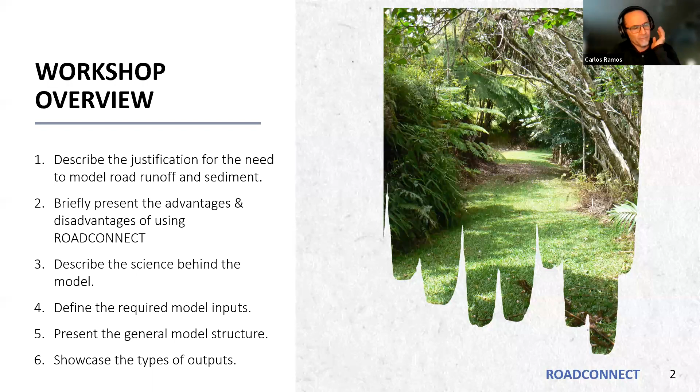So a bit of an overview of what I intend to cover today. I want to describe why do this, and maybe this audience doesn't need this introduction, but I just want to go over that as well, because maybe we're not really aware of other potential uses of this kind of modeling. I want to present the advantages and also the disadvantages of using RoadConnect. Describe the science, what goes behind the scenes, and how I use the science as part of the model. What it takes in terms of the model inputs.

This is an ArcGIS-based model, so the geodatabases that are required. Present the general model structure, what it's doing behind the scenes without all the details, because that's a bit too heavy and would take a very long time. And then also show you what it produces, the types of outputs that you can get out of this, and there's diverse types of outputs that it produces.

So in a nutshell, what does the model do? It takes 3 shapefiles. 2 of those are line type shapefiles: road segments and flow paths, and I'll explain what these are. And then points, which I'm calling here drains and nodes, and I'll explain that in a while. It also takes in, if it applies, a retention pond volume database, very simple, just a database without any spatial reference. And as you begin the model, the user is asked to enter a particular storm size in millimeters of rainfall. So the model runs on a storm by storm basis.

What does it do? It estimates runoff from roads, and in the next version of RoadConnect, especially for coffee farms, it is also going to contain estimates of cultivated land and forest land runoff response. The same thing with erosion, with sediment production.

Runoff from where? Just the roadbed. Okay. In terms of the road, just the roadbed. It's not trying to model anything else in terms of sediment production. It's not trying to estimate cut slope contributions, not trying to estimate any gullying that's happening below the road. Okay, it's just the roadbed, just the travel way, right? The drivable surface.

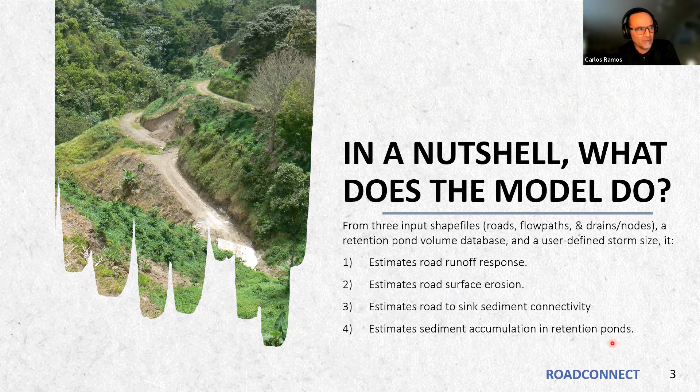Why study sediments? Why do a model on erosion and runoff? One of the first reasons, and this connects directly with the original objective of the model in Cabo Rojo, and also the work that, for example, Bernardo is doing in Culebra: sediments are a key pollutant and considered a major threat. It's not the only threat to coral reefs in the Caribbean. But the corals, as we probably all know, haven't been doing well at all, and they haven't been doing well since we actually started documenting them in the 1960s and 70s.

So here, just to give you a quick view, this is work that was done by Jeremy Jackson out of the Smithsonian Institution, collecting all of the data from throughout the Caribbean. These are regional curves. This curve on the left represents a combination of data from St. Thomas, USVI, Costa Rica, Jamaica, Belize. This is percent live cover in the 60s all the way to the 80s, in the 30s, maybe close to the 40s, and then by 2011, about 10% left. And this is a regional scale look.

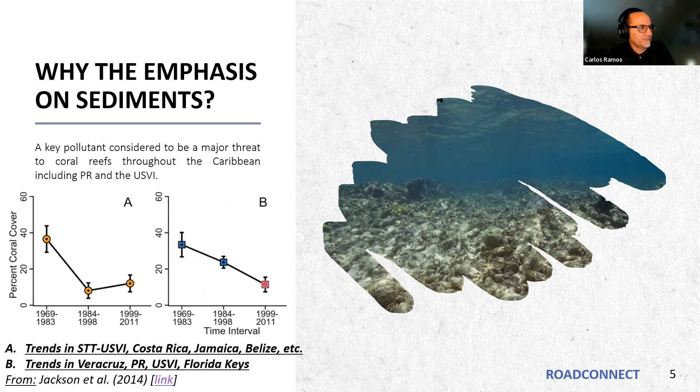This curve on the right, B, are trends in coastal Mexico, Puerto Rico, St. John, St. Croix, and the Florida Keys. From 30-something percent down to maybe 15%. When we look at it closely, this is the case for the U.S. Virgin Islands. It's the same curves, but specifically for the different islands.

St. Croix started in 20-something percent, dropping down. The same thing in St. John, even though we have a national park there. And similar trends in St. Thomas, and then combined with that, especially in St. John, you can see the increase in macroalgal cover.

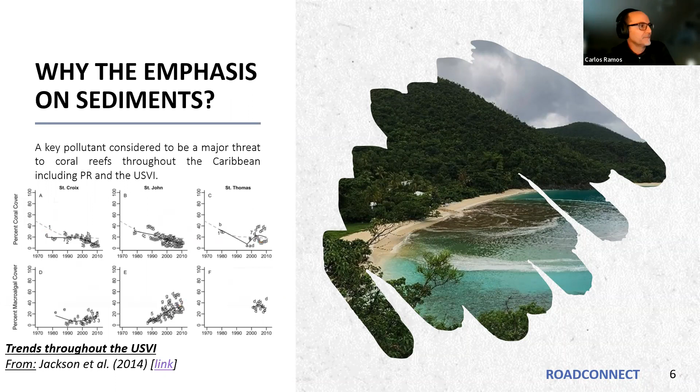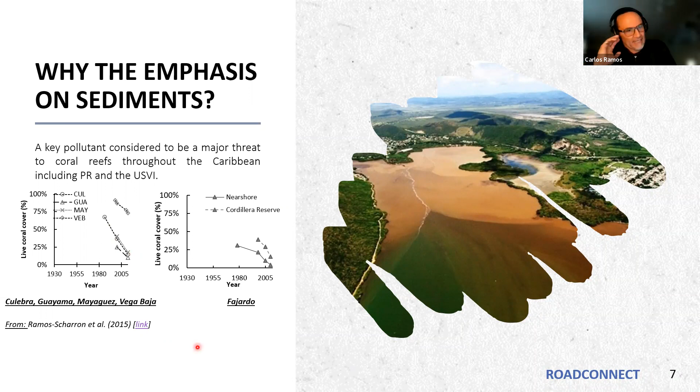How about in Puerto Rico? Same thing. Maybe more abrupt curves here, just because of the type of coral that used to dominate in Puerto Rico, the elkhorn that provides a really good cover. So areas in Culebra, Guayama, Mayagüez, Vega Baja, you can see them just plummeting down, from the 80s up to the 21st century. And then this is a close-up look at coral reefs near Fajardo as well, just plummeting down. And sediments being one of the stressors, not the only stressor.

To what degree do sediments affect corals? At the experimental level in a lab, you can isolate the effect of sediments. We still have not done a really good job combining watershed with water quality and coral reef response within the U.S. Caribbean, and that's something that Caroline Rogers, my colleague and good friend from St. John, and I discussed in this paper. We know it's a stressor, but to what degree it actually affects corals nowadays is still a research question. And hopefully the idea of the model, especially applications like in Culebra, is that the model can help start addressing some of those issues.

It's really expensive and logistically complex to maintain a very long-term monitoring program at the watershed, in the coastal water system, and then also with the coral reefs. So maybe the model can help us fill in some of those gaps.

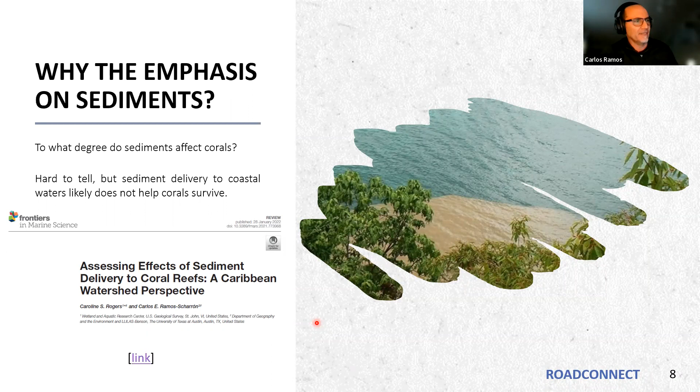Also, and this is something that I think when we discuss sediment issues in Puerto Rico, we tend to overlook, but it's a real problem: it's freshwater quality. Somehow nos acostumbramos a esto. We got used to this at some point in time, right? Rivers shouldn't look like that. Rivers don't look like that, even in other tropical areas, right? Naturally, they don't look like that.

And even in some areas that are being used by humans, right? That's something that we need to think really deeply about, as to why we got used to this. But there are challenges, right, to water treatment and distribution that are tied to high sediment loads. This is exactly what this news story is telling: one of the main filtration plants in Puerto Rico being unable to process water just because of the high

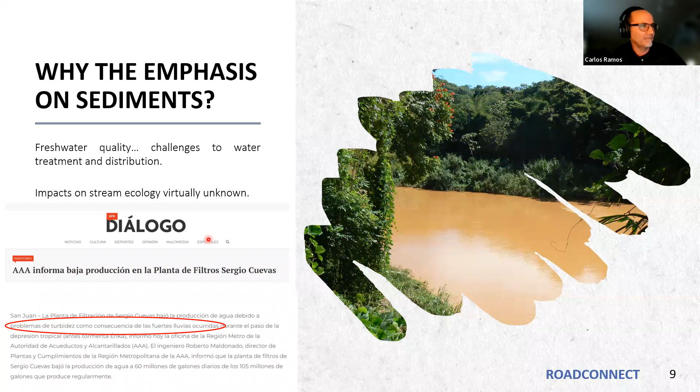loads of sediment. And then something that we really don't talk about, and this is almost a gap in tropical systems, especially in Puerto Rico, is that we really don't know what kind of impact sediments are having on stream ecology, shrimps, and other benthic organisms.

Another reason to do this kind of work is sedimentation of water reservoirs. We really don't know the state of our reservoirs. For the specific reservoirs that we know, we know where they stand in terms of water holding capacity and sedimentation. But for many of them, we don't know, and that's work that we are actually doing out of the University of Texas as well. But we presume that about a third of the water holding capacity, the design capacity, is gone. It's occupied by sediments.

And of course, erosion affecting soil, and the ability of soils to actually maintain vegetation and maintain a crop. But this is something that the models weren't really thought out for. It doesn't come out from that need, right? And that's something that, again, we could talk with the folks in NRCS about how to enhance that capacity of these types of models.

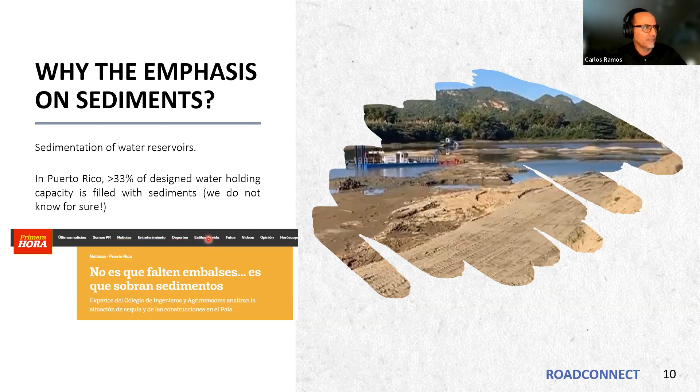Why the emphasis on roads? What you're going to be seeing for the next few slides is work that we have done throughout USVI and Puerto Rico. St. John, of course, that's where I did my dissertation work. East End, St. Croix, work in Culebra, some work in Vieques, work in La Parguera, and work in Cabo Rojo. All of those have in common that they are in a dry tropical setting.

And the most extreme of those settings, which is East End St. Croix, kind of looks like this. That's cacti, right? Really dry conditions, inceptisols mostly in terms of the soils, ephemeral streams, which means that there's very little opportunity for the watersheds, under natural conditions, to contribute runoff and sediment to the marine environment. That's why we have corals near these areas, just because that interaction with the terrestrial environment in terms of inputs is really limited. It happens a couple times a year. And rainfall totals are in the 800 to less than 1,000 millimeters per year.

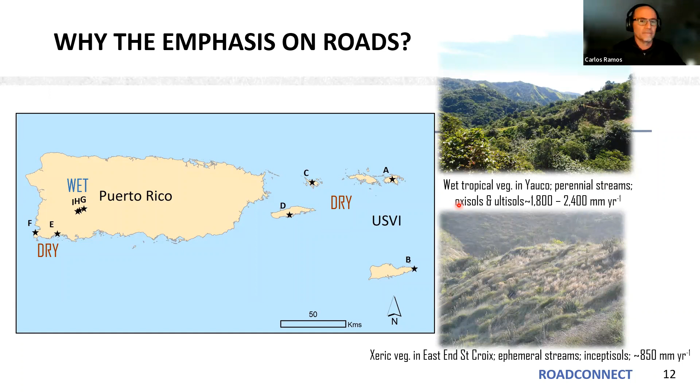And for those of you who are interested, we have a series of publications dealing with these issues. These are not the only ones, but please let me know if you want to get a hold of these. I'll be happy to share them with you.

But a basic result coming out of all this work is that the roads are really driving the sediment budget of all of these landscapes that we have studied. Road erosion rates in dry tropical settings are 10 times to 10,000 times greater than natural areas. And at the watershed scale, road erosion contributes over 90% of the total sediment produced. And this applies to, again, Culebra, Vieques, St. John, St. Croix, St. Thomas, Cabo Rojo, Parguera.

In wet tropical areas, road erosion actually has a greater effect than in dry tropical areas, up to 100,000 times higher than natural erosion rates. And people say, and this has been very interesting, I think Atienza was there when we did that workshop on site at Hacienda San Carlos, Carlos Vega's farm, farmers said most of the sediment is coming from the cultivated land. We had sediment traps on site, and we were able to show visibly that's not the case. Most of the sediment is coming from the roads themselves, the road network.

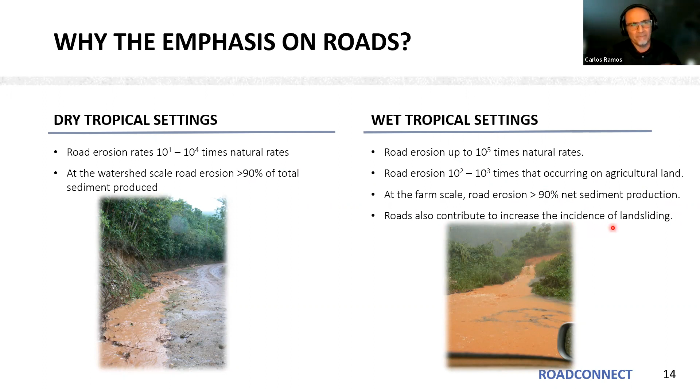So road erosion is actually 100 to 1,000 times greater than that occurring on agricultural land. And similarly to dry tropical settings, over 90% of the sediment is being generated by the road network. And this is something that I'm not going to be talking about today, but roads can also contribute to increase the incidence of landsliding. And maybe RoadConnect could help us understand that process a little bit, but I'm not going to be talking about that today. So why use RoadConnect? There are many other models.

But many of them are still unproven. And there's models that are specific for road erosion, but they have not been proven or tested for our types of landscapes and climate and soils and lithologies that occur in the U.S. Caribbean. Okay, that's a research question that needs to be addressed, right? And most other models do not address sediment contribution from roads. Roads are either ignored or lumped with everything else.

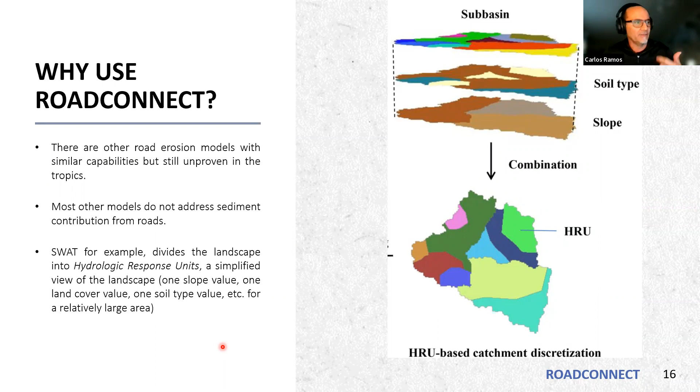An example of that, and this is a model that has been used extensively in Puerto Rico, is the SWAT model, Soil and Water Assessment Tool or something like that. SWAT, for example, generalizes, simplifies the landscape into something called hydrologic response units. So it lumps the diversity of landscapes that are out there, divides the watershed into those, and then makes a calculation in terms of runoff and sediment for each one of those. So there's only one slope value, one land cover value, etc., and then just one result.

So what would SWAT do with this type of landscape? There's a coffee farm in the uplands of Puerto Rico. What I want to point out here is there's obviously a different type of vegetation here, most likely secondary forest. We have this area here, which has a lot of plantain. Most likely the soil exposure is very different from what is over here. Another pocket of early succession, turning into secondary forest. And then, of course, we have the roads.

SWAT will take all of that area, and most likely areas surrounding this farm, and lump it into one single value. So people say, but we have SWAT. Yeah, but SWAT would just give you a solution for that entire watershed. For that entire farm, we cannot really cure the problem throughout an entire farm. That's just too costly and logistically impossible. So we need to find targets, and then we need to find priorities.

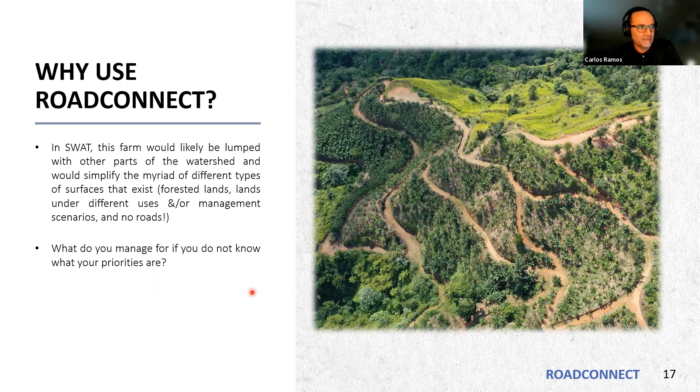And the research that has emerged over 30 years of work so far is that the roads are a priority. But then which roads? You cannot address every single one of those roads. That's too expensive and logistically impossible. So RoadConnect is trying to address that: prioritize which roads actually to address for erosion control implementations.

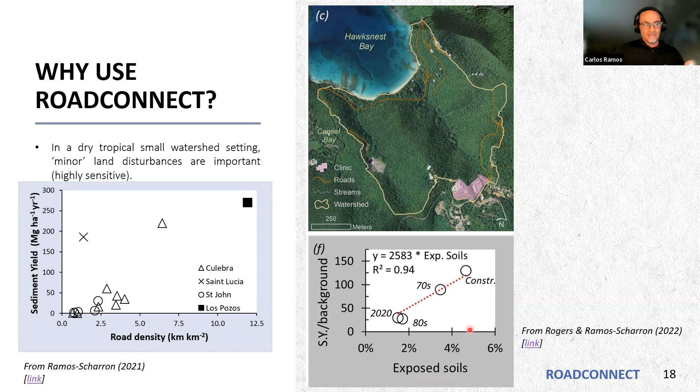These landscapes, especially these dry tropical landscapes, are very, very sensitive. Small scale disturbances can have a drastic impact on sediment delivery to the coastal area. This is an example from Hawksnest Bay in St. John, mostly within the park. Here we're showing that just a mild increase in exposed soils, construction of a clinic, some roads that exist within the watershed causes a very dramatic increase in sediment yields above background. Just disturbing 5% of the landscape increases sediment yields by over 100 times.

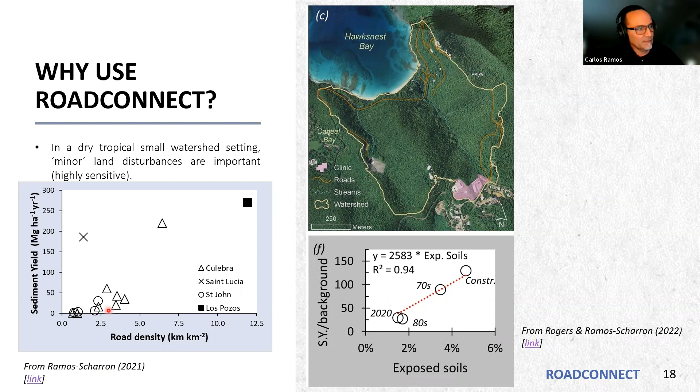And all of these are corals. The outlets for the little drainages that come out from this watershed, there's one here and another one here, are a couple meters away from the corals. So very sensitive. And what we have been promoting is that sediment yield is almost a product of road density, and these are unpaved roads. So as you increase the density, you increase the sediment yield. So that's the dry tropics.

How about the wet tropics and the coffee growing area of Puerto Rico? There's tons of roads. It's unbelievable when you actually look underneath the canopy how many roads are there. This was shocking to me, and this took a lot of time to map. We used LiDAR to map this. This is Lago Lucchetti in Yauco. You can see how many roads, over 900 kilometers of roads, and I would say about 85% of those are unpaved.

These are the main roads, the public roads, carreteras estatales, but everything else in brown are roads within coffee farms. Just so that you can navigate a little bit, Hacienda Candelaria would be here. These are the Ruiz family's farms up here, and then Carlos Vega would be somewhere around here.

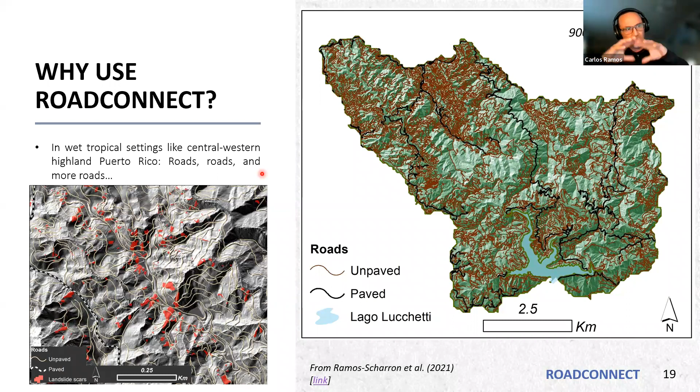So this accumulated impact of all these roads is really severe. Okay, so they're part of the landscape and they're there to stay. So we need to understand them. Here, a bit of the science behind RoadConnect. Where do the functions that we use to calculate runoff and erosion come from?

Okay, a lot of what we're doing comes from rainfall simulation experiments. Basically, we bring this rainfall simulator, just a fancy shower, right? That's standing about 4.6 meters above the ground. We use a water truck to pump water into the system. We delineate the surfaces that we want to measure, and then we collect runoff and sediment coming out, okay?

With the combination of rainfall measurements, you can see some rain gauges along the sides of the plot here, and knowing runoff, we can actually back calculate infiltration capacities, and that's something that is used for the model. So this is two different plots for a cultivated surface and a road. I believe this is probably an oxisol or an ultisol and an unpaved road. And this is a cultivated surface mostly for coffee, okay?

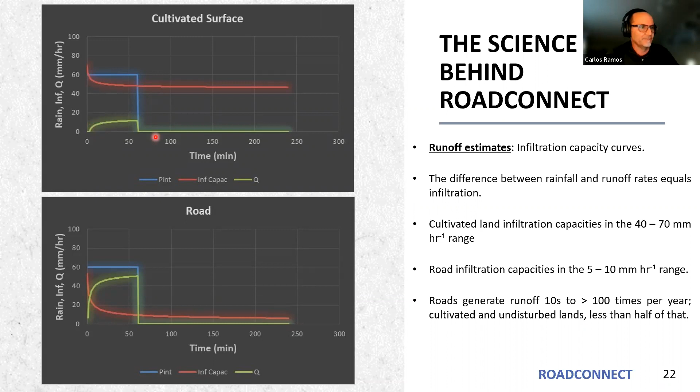And then also for individual roads, depending on the slope, depending on the surfacing, we can also calculate infiltration capacities. What we see in here is an unpaved road, and then this is a gravel road. The changes are not as dramatic, but the gravel road has a slightly higher infiltration capacity than an unpaved road, okay?

So far, in terms of the data that we have to feed the model at this scale, in terms of rainfall simulation, we have over 100 simulations done in coffee farms in Puerto Rico, about 15 in Culebra, and about 20 so far in Cabo Rojo. So we use these to create the functions of the model.

Other types of measurements that we can use at different scales: a Guelph permeameter, just a borehole test. We can use flumes, and this is a way that we're going to be using to validate the model in Hacienda Candelaria and Yauco, to see if the model actually provides us with a realistic volume of water flowing out at the scale of maybe a portion of the farm. This is really important, just showing that the model actually provides realistic results.

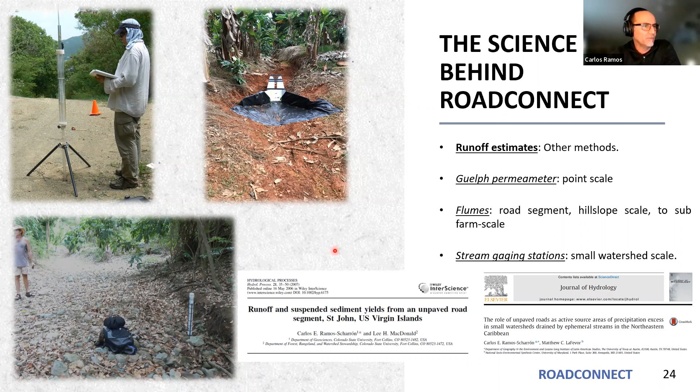And then in St. John, we have actually monitored stream flows coming out of the small watersheds.

How does RoadConnect actually use this information? RoadConnect simplifies the hydrologic response by just using the runoff coefficient. And runoff coefficient is basically the percent of the rain that is converted into runoff. So roads of different types, with different soils, with different slopes are going to have different runoff coefficients, and that's embedded in the functions and the algorithms that go into the model.

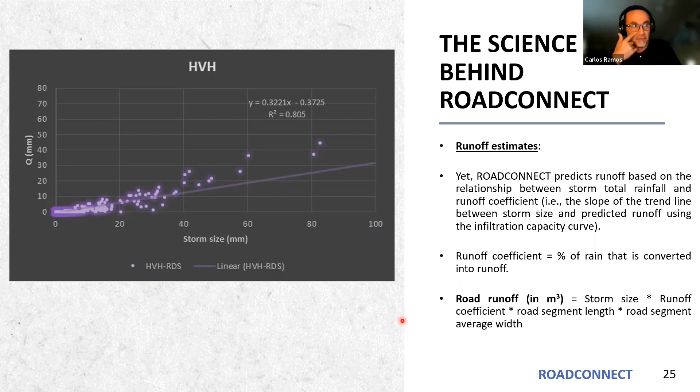So road runoff in volumetric terms depends on the storm size, the runoff coefficient, how long of a segment you have, how big of a surface you have that's actually generating this runoff. Okay, very simplistic approach, but it's fed from actual data collected in these areas.

For erosion, we also depend on rainfall simulations. Eventually, we can also use other types of data. This is actually part of Jaciel's thesis, using sediment traps. We have used sediment traps to measure erosion rates from cut slopes.

And then similarly to the flumes that I just showed you, sediment detention ponds can be used as a way to see if the model is right in actually conveying all of that sediment from the road downstream. So we have used this to calibrate or validate the model in Cabo Rojo, and that is done by just measuring accumulation rates using surveying equipment.

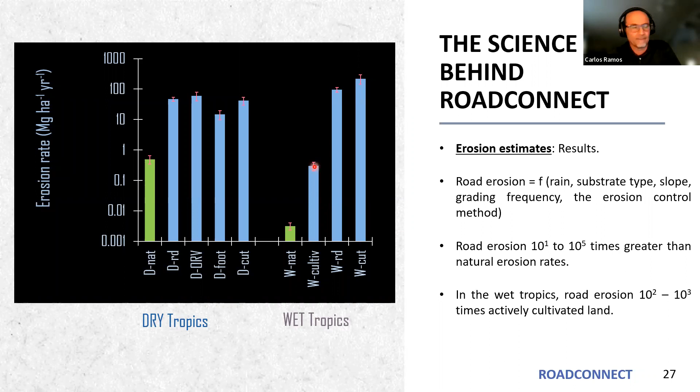Okay, you had a brief overview of this already, but then, right, the impacts of roads in increasing erosion rates. So in the dry tropics, several orders of magnitude, the same thing: natural rates, and then these are roads. They're having a much higher effect on erosion rates, and roads actually have erosion rates that are much higher than cultivated land. And these are orders of magnitude higher. Very similarly to runoff.

How do we calculate road erosion? In tons. Each road type is going to have its own erosion rate. What do I mean by road type? Its location, which controls its lithology and soil type. Whether it's been graveled or not, how often the road is graded, how steep the road is. So all of that information needs to be given to the model, and it recognizes which road you're talking about and then applies that erosion rate.

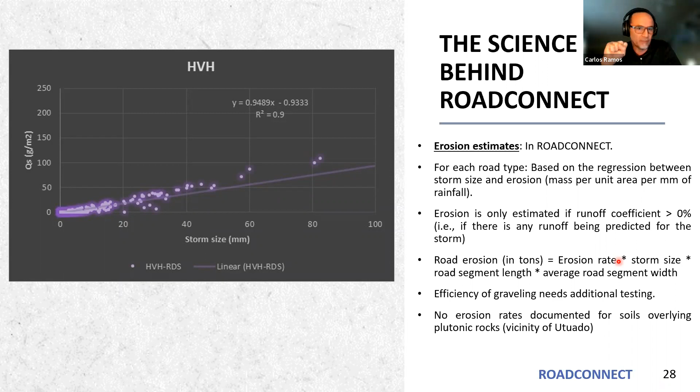Storm size, that's a user-defined parameter in RoadConnect, and then the size of the road, the road surface that's actually producing the sediment. I'm just going to point out that the efficiency of graveling is going to be embedded in the model, but it needs additional testing. We only have 4 rainfall simulations done on properly graveled roads, and that's something that needs additional testing, which means it needs additional funding.

The same thing with cultivated lands. We have a very limited amount of data on those. Most of the work that's been done has been done in Yauco and Maricao, especially in the coffee farms. So nothing has been done on the coarser soils in the vicinity of Utuado. For Culebra, for the US Virgin Islands, I'm satisfied with what we have. I don't think we need to go back and do any more simulations.

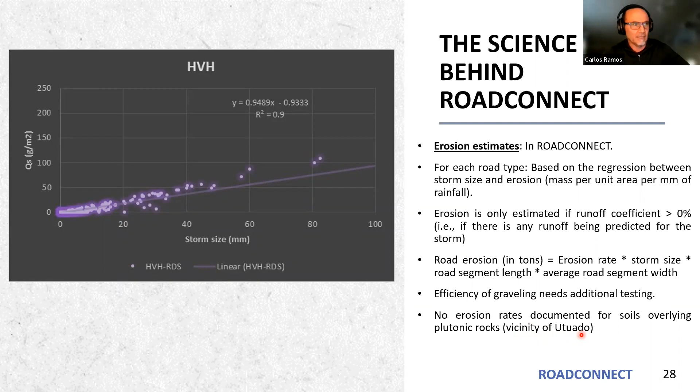Connectivity: how much of that sediment that's produced on parts of the landscape actually makes it down into a water resource of importance? This is one of the hardest problems to deal with in hydrogeomorphology. Logistically, it's very, very hard to do, and also the physics of these processes are very complex. You can see that people from the 80s all the way to recently have been trying to come up with approaches to this, and I'm proposing a new one. This is a new approach to road connectivity, especially with the sediment portions.

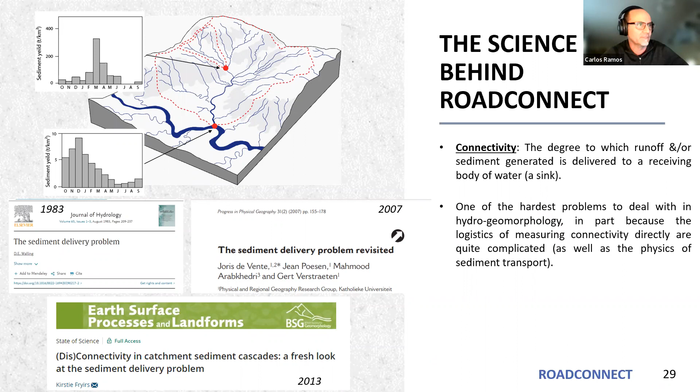So given a certain set of circumstances, storm size, the length, the surface area that is actually generating runoff, RoadConnect tries to tell you: can that runoff actually make it during one single event all the way to your target or your sink? If the answer is no, then that's a 0. None of that runoff or sediment made it out into your sink. If the answer is yes, then it tries to answer how much. That number is always going to be less than 100%.

There's always going to be some water that's going to be infiltrating into the landscape. There's going to be some sediment that gets filtered. And one of the things that RoadConnect is trying to do is to see not only the filtering capacity of the landscape, but also detention ponds. And we'll see how it handles that.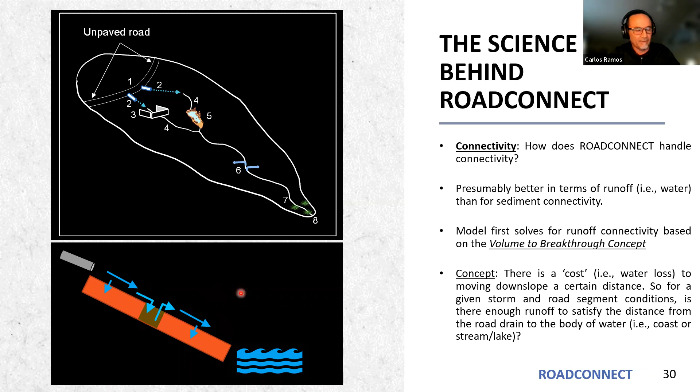So the metrics of the volume to breakthrough concept are in cubic meters of water needed to advance 1 meter downslope. So if it costs 0.25 cubic meters of water to advance 1 meter downslope, how far can 100 cubic meters generated by a road at a culvert travel downslope? So basically this is the potential, the water that you have available, that runoff. That's the cost. You basically divide the potential by the cost, and that gives you a total distance that water can run over the surface.

So if a coastline is greater than 400 meters away in this situation, then you have no runoff delivered. But what if a coastline is 200 meters from the road drain? How much of the original 100 cubic meters is delivered? Basically use this ratio. This is your potential, and this is reality. You solve for that, and in this case, 50 cubic meters of runoff will be delivered to the coastal environment or to your sink.

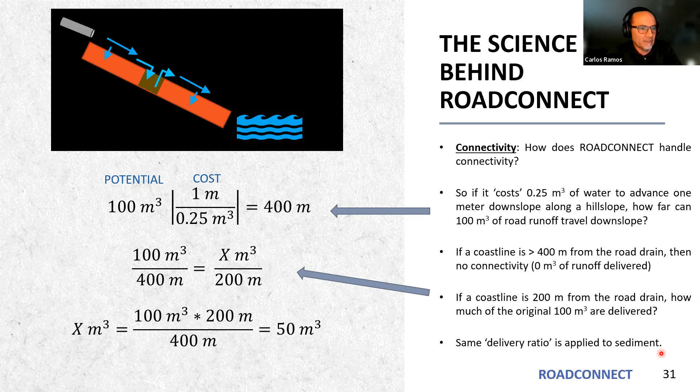Okay, and the same proportion is actually applied to sediment. That is not accurate, that is not correct, but that's the best we can do right now. This will require really sophisticated experimentation. Okay, it's doable, but then it requires fieldwork. Okay, this is the best we could do, or somebody else develops an equation that we can actually rely upon.

Okay. Now I mentioned sediment traps. How does it address the trapping capacity of sediment traps? It uses this equation. Okay, I'm going to boil it down into the essence of this equation in the next slide. But notice this. This has not been tested in the Caribbean. Again, another opportunity to do field work and to have additional work feeding into these types of needs, right? We are increasingly relying on detention ponds, especially in Culebra, to reduce sediment delivery to the coastal environment.

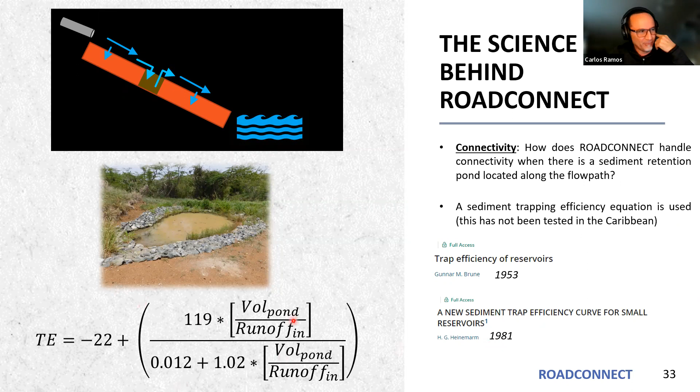But we rely on an equation that actually, the essence of the equation, the parameters, right? These numbers, what does that mean? I really cannot tell you right now what it means, how they came up with this. This is empirical data, right? From 1953. Okay, and then revised or reformulated in 1981. Okay, so this is another opportunity for additional research, and this is the type of research that National Science Foundation and those guys are not going to fund. They're not interested in this kind of stuff. Okay, this is too applied. Okay, so these funds have to come from somewhere else.

So in essence, what does the equation say? The larger the pond to runoff ratio, the larger this, right? So a very large pond, very small runoff event, you're going to have a high trapping efficiency. Okay, the smaller the pond and the greater your runoff input, the less efficient it's going to be at trapping sediment. Okay, so trapping efficiency depends on event size, and also the surface area that is flowing into the pond. Okay, and it also depends on what? How much sediment is trapped in the pond. Okay, so as you accumulate sediment, the trapping efficiency diminishes. Okay, and this is something that manually we can still incorporate into RoadConnect. We can see how the efficiency actually declines through time.

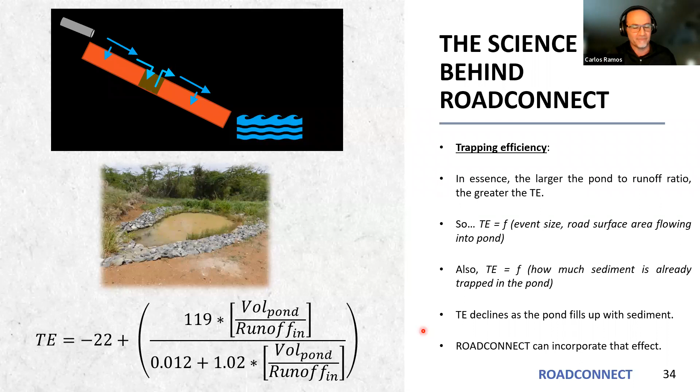What is missing in RoadConnect? There's only one runoff generation process that we can actually incorporate into the model. That's called precipitation excess. Basically, when it was raining harder than infiltration capacity. Okay, that's what we measure directly during rainfall simulations. That is not the only way that.

Sorry, I'm watching a Mandalorian, so on the way I always hear "the way" and think about that.

That's not the only way that runoff is generated. Actually, under natural forested conditions, there's other processes that contribute to runoff production, right? And one of them is saturation excess overland flow. We basically saturate the entire soil profile, and then it emerges onto the surface. Okay, that is the predominant process by which runoff is generated in most of these landscapes. But especially in dry tropical scenarios, this is very, very rare. Okay, typically soils are really dry.

When is this process actually triggered? Whenever you have a very long event, or a series of events in succession, right? That's where you can actually saturate the soils. And then you have this, what I'm showing here, this is in Culebra. That's very rare to see in Culebra, right? A flowing creek. This is a condition in which runoff is mostly being generated by this process and not this, okay?

And the geodatabase, when you see what it takes, it's still very, very hard to do. It takes a very long time to develop those, especially in the coffee farms. In Culebra, it's a bit simpler, but in the coffee farms, we'll see what it takes.

One thing that I want to show here, I'm going to step away from my PowerPoint, is a product that is ready to go, and we'll share it with you guys, Alberto and Gabriel and whatnot. This is something that we came up with as part of this project to help you make estimates of runoff production from coffee farms and also sediment production from coffee farms.

Okay, and at some point, dime. Sí, tenemos una hora. Okay, perfecto.

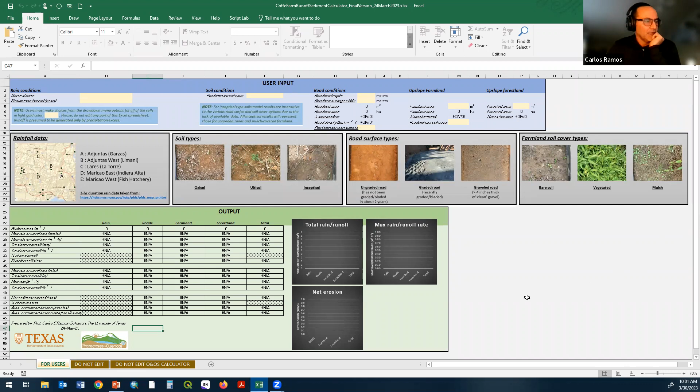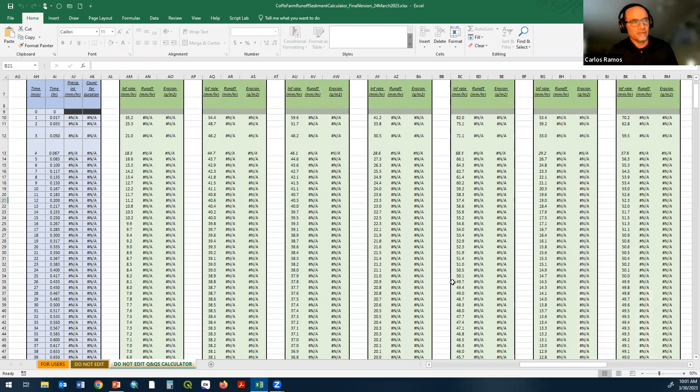So this is something that has all the functions, and again, these are all locked, but this has all the functions that I was talking to you about in terms of erosion and runoff and infiltration capacities and whatnot. So that's embedded in here. Now, it's very simple to use as well.

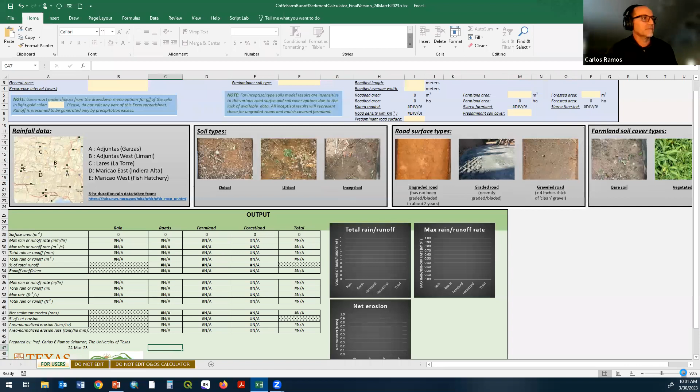And at some point, Alberto and Gabriel, we should sit down and see what you think about this, because I know you use the curve number method, and we would like to compare and see how useful this is for you. So first thing that you do, and this is not RoadConnect, this is an Excel spreadsheet on its own, you choose the general area that you're working on. So here we have Adjuntas all the way to Maricao.

This is feeding off data from the weather service, from 3-hour duration rain data. So let's say your farm is in Maricao, in Indiera Alta, and you want to model a runoff event that has a recurrence interval of every 50 years. You can see you can choose from 1 all the way to 100.

And again, these are 3-hour duration data. If you guys use a different duration for your modeling and your estimates, it could be easily adapted to this. That should not be a problem. That's the kind of conversation that I want to have with you. What is the predominant soil type? We only have here what we have actually done experiments on: ultisols, oxisols, which seem to be responding very similarly, and then inceptisols.

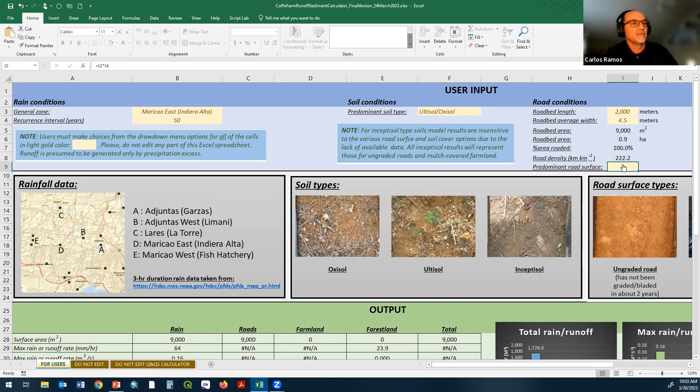Let's say you have a farm that's draining into a spot where you want to design a culvert. How many roads do you have above that? Let's say that we have 2 kilometers. What's the average width of the roads? Let's say 4.5 meters. The predominant road surface: is it mostly ungraded, freshly graded, or gravel? Let's say it's recently graded. These are going to produce much more sediment than an ungraded or a gravel road.

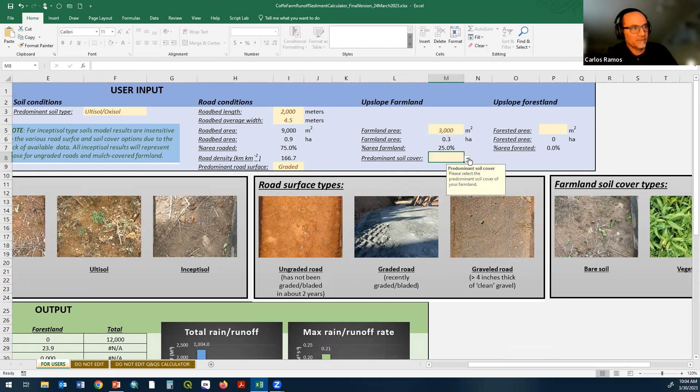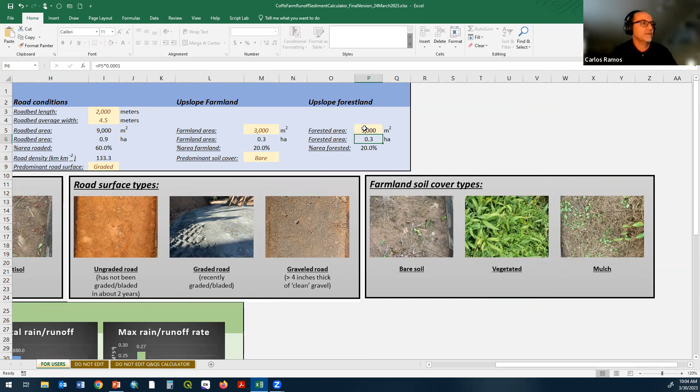What's the size of your farmland area, the cultivated land? Let's say 3,000 square meters or something like that. And what is the predominant soil cover? Is it bare or vegetated mulch? You have visuals to guide you to what this looks like. Let's say it's bare, let's make it as nasty as possible. And then you have 3,000 meters of forested land upslope from you. It calculates and gives you immediately the maximum rain rate. So this is the rainfall.

Okay, it gives you runoff rate from each one of them, and then also total. Okay, so for example, for this event, and I'm not gonna stay too long here. I'm just gonna show you this, right, and then we can talk about it later. But it gives you a total volume. Okay, it's also useful for designing like detention ponds and that kind of stuff, right? And then the maximum flow rate into the pond.

Okay, and then it gives you the amount of sediment that's eroded and the amount of sediment that should make it into that spot. And again, this is not RoadConnect, but we did this as an aid, considering the needs that you have for modeling this kind of stuff and seeing how this compares to the actual methods that you use nowadays. Okay.

Yes, Carlos, just a quick question. I really like that spreadsheet. Is that something that we can expand to the whole Puerto Rico or Caribbean area? Because I see it as a good tool for, let's say that island-wide, we want to rank farms and we want to address the farms that are eroding the most, and that way we'll have a way that we can rank them. That's a good use of this,

but then remember, this is just calculating how much runoff and erosion is generated. It's not, and that's why it's different from RoadConnect, it's not connecting that into the receiving waters or streams. Okay, so still the use is visible now. What you're seeing here is feeding off only the rainfall simulations that we have conducted in a very restricted part of Puerto Rico. So in order to do that, we will need to either replicate that or have data that we can actually trust.

I mean, again, these are our oxisols, ultisols, mostly from upper Barrio Rubias and Frailes in Yauco, and then Indiera Alta, Indiera Fría in Maricao, and then some inceptisols that we ran into also in Yauco, in Aguas Blancas, right? But again, yes, it's possible, but we don't have the data for that, Alberto.

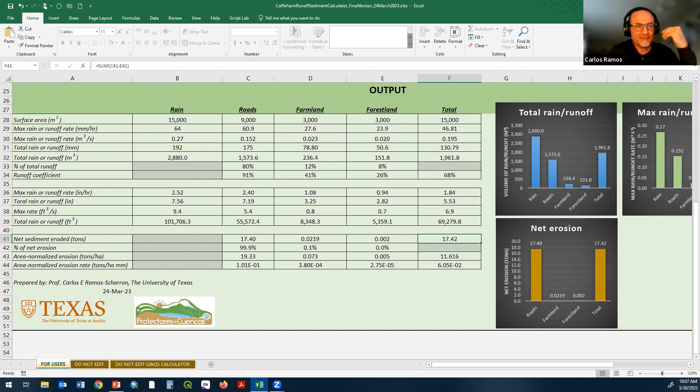All right, yes, thank you so much. That's really interesting. The potential is there for that kind of stuff, and yes, that's the whole idea. And then for us to talk and come up with something that makes sense from the perspective of science, but also from the perspective of your needs, right? So this is supposed to be customized for you guys. Absolutely, thank you.

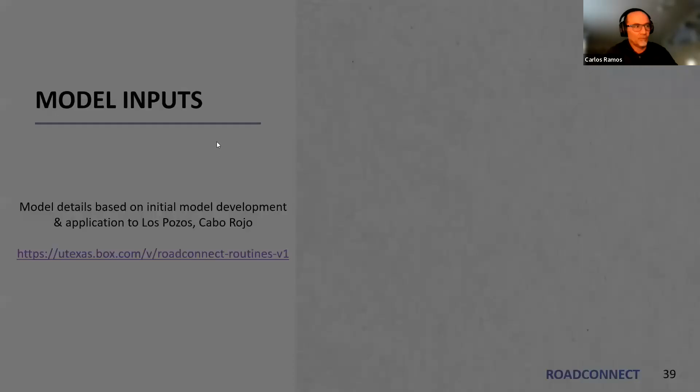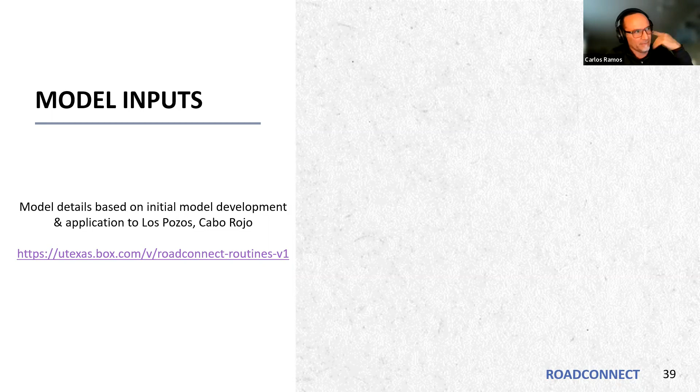Okay, so what does it take? Going back to RoadConnect. What does it take? Again, you can click on this and that will take you to a lot more detail than what I'm going to be presenting here as to what the model does and the inputs. Now, important for RoadConnect, and I don't want to get too technical, you need to create this folder called RoadConnect in your C drive, and you immediately see why I'm a rookie at modeling, right?

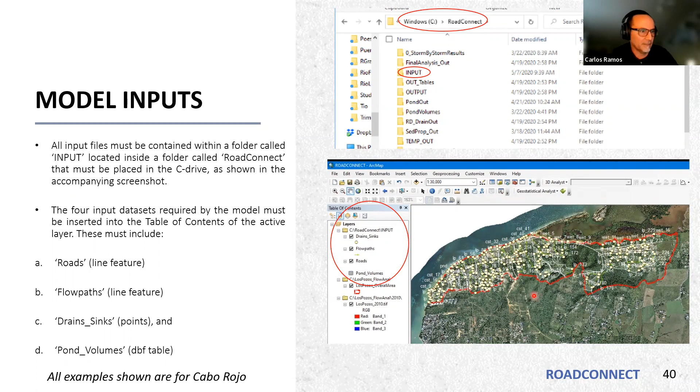Okay, roads. The roads have to be split, right? So you map all the roads. You can use aerial photography. You can use LiDAR, right? LiDAR shows everything that's under the canopy. So the combination of both is what I would recommend. And then if you can go to the field, you can map the drains, and actually you can do sketch maps of how water is flowing, right?

You want each segment to be hydrologically consistent, meaning, for example here, let's assume that this is draining this way. The slope of the road is this way, and there's a drainage point here that's taking all of the runoff coming from above and forcing it off to the side. So this is the end of a segment and the beginning of another segment, and then there's another drainage point here, and that's the end of that segment. That segment is represented by a line here, and by a row here. Okay.

Important details, attributes, right? Characteristics that must be stored in this shapefile. This is a shapefile. The road length, you allow ArcGIS to calculate that for you. The road width is something you can either measure in the field, or you can use aerial photography or the LiDAR DEM to help you with that. So those two are relatively easy, and then the area is just a product of those two.

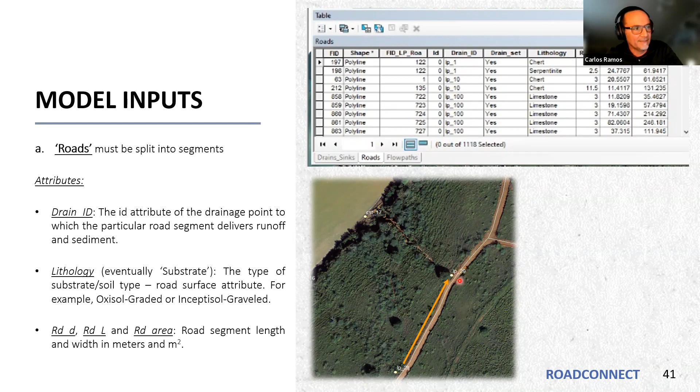And then drain ID is basically, this road segment ends here and is draining to this segment. So this segment, whatever it's called, should have LP_29 in its drain ID entry. So this connects to that. So that is the road input necessary.

Flow paths. Flow paths is something that we rely on ArcGIS to do for us, and sometimes you need to edit some of them a little bit, but you rely on the digital elevation model to create these. Basically, every road drain that we see here is going to have a flow path. So you use topography, you use ArcGIS to map the flow path.

So, for example, a drain exists here. That drain would force all the runoff into this area and then join this other flow path here and start coming down. So you can see what the flow path is saying. It's just tracking the distance from your source, from where the road is dumping water and sediment, and it's telling you where it goes.

Two attributes are important here. The drain ID is basically the drain that's leading into that flow path, what is the point or node. It needs to know that name. And then its length. If you remember the volume to breakthrough concept, that's where that distance comes from. Can you actually overcome the distance required? For runoff delivered here by a road, can it make it all the way out into the coastline? So again, this is another type of input.

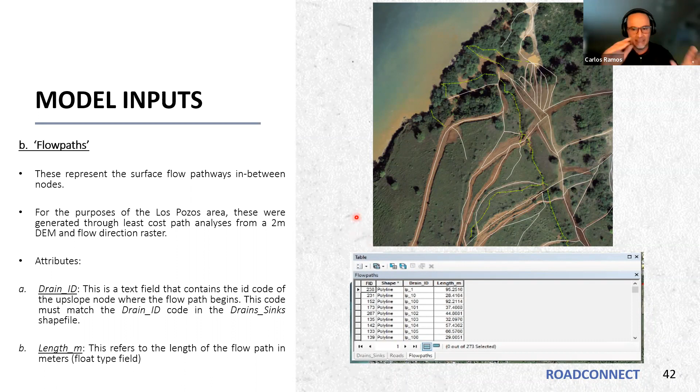The drains or the nodes, the points. There's 5 different types of points. Road drains: the culvert, the cross drain, the point where runoff exits the road system. Connectors, where 2 flow paths meet. For example, I'm not showing all the points here, but that's a connector right there. You see there's a flow path coming through, another one coming through here, and they meet there. So that's a connector.

Sediment retention ponds, we got 2 here. There's one here, there's another one here. So those are identified as well. And end nodes, these are the ones connected to your sink, in this case the coastline. So these 2 are end nodes.

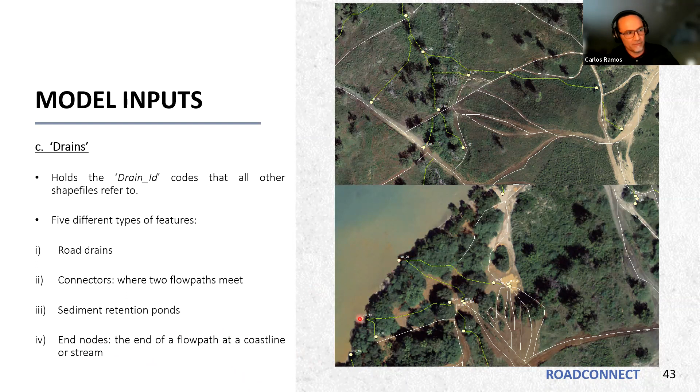What goes into this database? This is hell in ArcGIS. This is the hardest part in terms of the time and level of concentration it requires, because it's being done manually at this point. These are points, and the points are not really easy, but you can use contour lines and the topography to guide you through mapping those, or if not, you rely on mapping at least the road drains in the field.

Now, you can see that the attribute table for each one is a bit more complex. It's got its name, its drain ID. And again, the drain ID is a way to connect the road inputs.

What's coming, what I calculate from the road shapefile into this database. Okay, and it also connects with the flow paths. So this is what's tying up this database with all others. So drain IDs, right? It tells you the type, whether it's a pond, whether it's an outlet, whether it's a road drain, whether it's a connector.

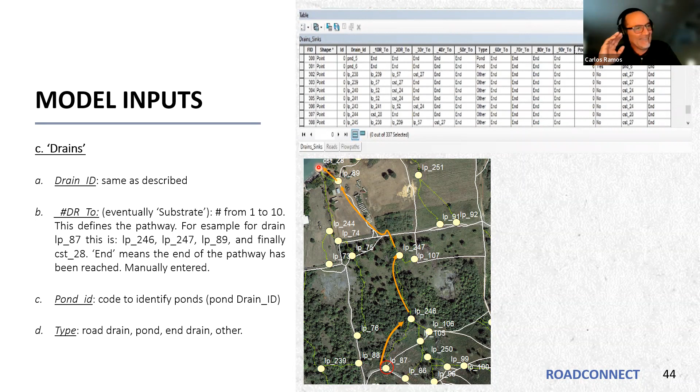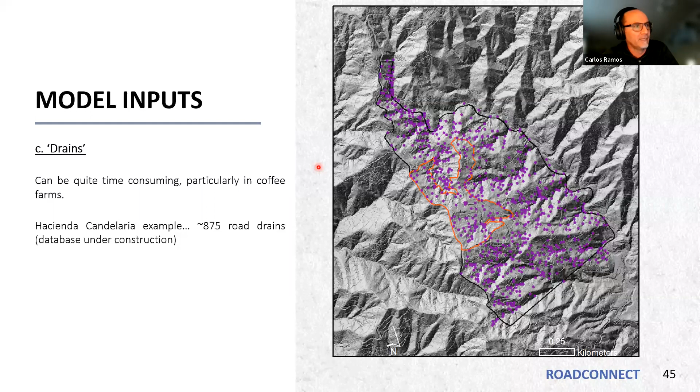Again, in Culebra, it's much easier, right? Because we have less roads. But how about the coffee farms? This is Hacienda Candelaria. 875 road drains. It's not even the connectors, right? These are only the exit points from the road network. So this needs to be automated eventually, right? That's what I wanted to do. This requires so much time, and researchers, we're just nuts, right? So we can go ahead and do this, but you cannot expect people to spend the time doing this.

And then you can see here how this is again Hacienda Candelaria. You can see how the different road drains are actually being connected, and the attributes are the ones that make those connections possible. And this is still in the works. This is something that I've been working on for a couple of months now, whenever I have the time. But you can see how the database is being built. This is relying on topography and the LiDAR DEM to draw those points and make the connections.

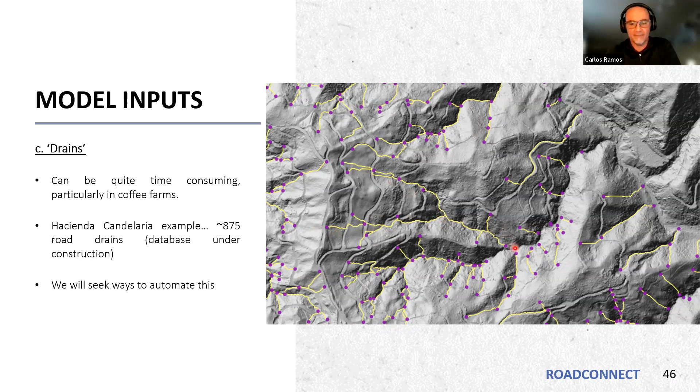Yaciel, how are we doing with time? We have 40 minutes. Okay, we're good.

And then the ponds are identified as points in that database, but it also has a separate table, which for the pond name has the ID that it has on the point database, and then it has the volume of the pond. This is something that the user can change. One thing that I do, let's say that I want to run the model for a month's worth of rainfall. The results of the first storm tell me how much sediment accumulated on the pond, and then I subtract that amount from this. So I keep editing manually this database. So the next event, the trapping efficiency is going to be less.

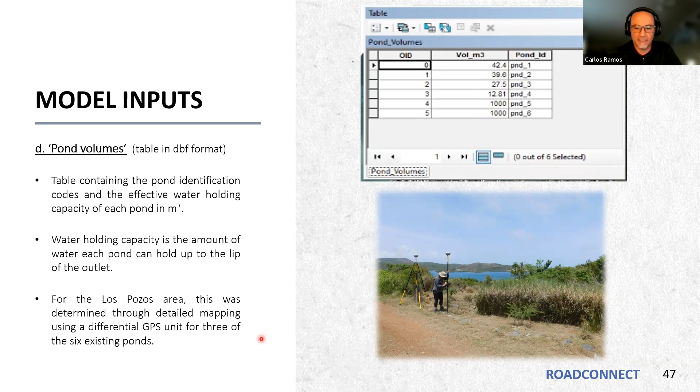So we can actually do this with RoadConnect. And then the volume, right? We use surveying equipment to actually measure them, and we're going to be trying to use LiDAR to measure some of these as well for Culebra.

Again, I don't want to spend too much time on this, but it needs a series of folders to be pre-created. And most of them start up empty. The only one where you need to have some information is where all of those shapefiles on the pond database are saved. Everything else is going to be used by the model, and it's going to be throwing information there. And again, you need to be on the C drive in order for this to run properly. If not, the model is going to get lost, not be able to find the information.

It's built on Model Builder. Model Builder automatically creates Python code, but I don't even look at that. Model Builder is a very visual way to create these models, and it's a series of modules if you want. In total, it's what, 10, 13? There's a series of models.

There's one module that actually calculates road runoff and sediment. Basically it takes all that sediment from the roads and tells you, for this event, how much sediment and how much runoff is generated by each one of those road segments. The routing ones are the ones that are passing sediment and runoff downslope or downstream. And then these last two are basically just assembling the outputs.

Okay, this is the road runoff and sediment routine. It calculates discharge and sediment based on user-defined storm rain total, right? So basically what I showed you earlier, how do you calculate runoff using the runoff coefficient, and how do you calculate sediment based on erosion rate. Okay, that is what it does.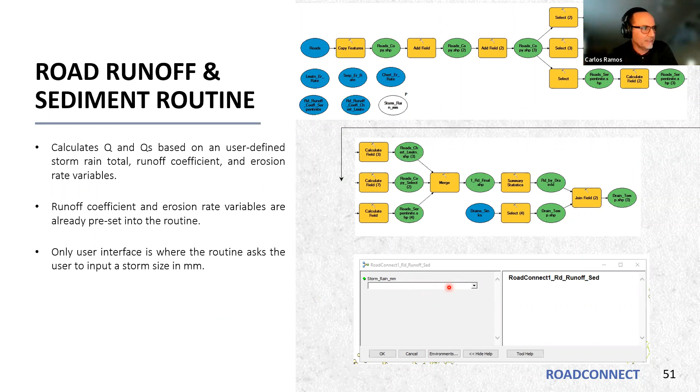And then when you start the model, they'll ask you, okay, what is the rainfall size? What's your storm size? So this is the only time that you actually have an ability to interface with the model. This could be 5 millimeters, it could be 100 millimeters, depending on the storm size that you want to model.

The routing routines, again, I sort of explained this already, right? But it tries to connect how much of the runoff generated at a point, or reaching a drain, actually makes it into your destination. And it is able to combine different drains if they actually coincide in space.

Okay, so the ability of runoff and sediment generated at this point to make it to the coastline does not only depend on the volume of water and the length of that flow path, but it also depends on whether there are any other contributions, right? If this is very small, but still makes it over here, and this is huge, then this has a higher potential to making it down into the coastline. So that's basically what I'm showing here. The potential from A to E depends on the potential from B to C to D, and from D to E. And it combines all sources.

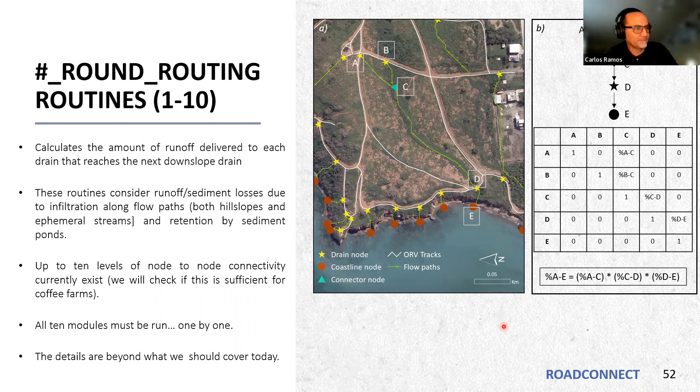And you can see how complex this gets in some landscapes, especially in coffee farms. Right now we have up to 10 levels of node-to-node connectivity, so we can have 1, 2, 3, 4, 5, 6, 7, 8 connections before it makes it into the coastline. We'll see if that's enough for the coffee farms. I believe it is, but we'll see. And then it just assembles the outputs, the tables and the shapefiles that it's going to put together.

Types of outputs that it produces. And this is actually an input, but I just want to show it. This is what we did in Cabo Rojo. We had rainfall data from May all the way to the end of July, or early August, and these are the individual events that we modeled.

Now, one potential output, and again, this still has to be manipulated by the user, right? It's not that the graphs come out automatically. That's something that you really cannot do automatically from ArcGIS. This is something that you need to export into Excel or whatever package you use. But these are examples of watershed, a given area, or farm scale outputs.

It is the total amount of runoff that is generated, or the total amount that actually makes it into the sinks. So again, cumulative runoff. This is the total runoff produced by the entire area that we modeled in Cabo Rojo. So you can see one event, very little runoff, and then a lot of runoff was actually generated. And you can see very little response to this event, and then a larger event, a bigger response. And the same thing with sediment.

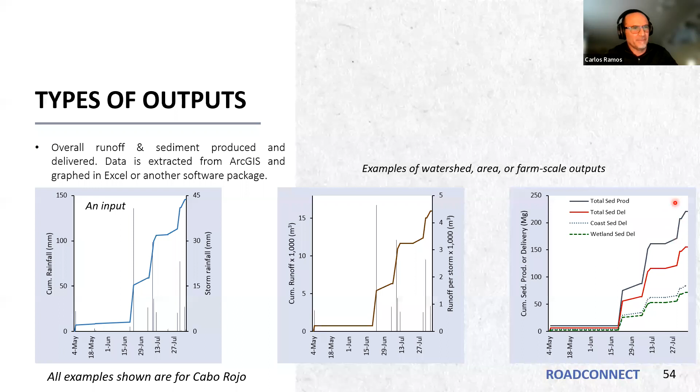Now, here we can differentiate between the amount that was actually generated by the roads and the amount that actually made it into the coastline. So you can see only a fraction of the sediment actually makes it into the coastline. And then here we differentiate between the coastline and the wetland because we have the Boquerón Reserve right there. And then the same thing for the ponds.

You can graph how much sediment is actually accumulating in each pond, or you can simulate that. And then you can calculate, according to the original volume, what's the proportion of that original volume that's actually being occupied by sediment. And for me, this is really, really useful, because it gives you an idea of the management plan for each one of the ponds that you have.

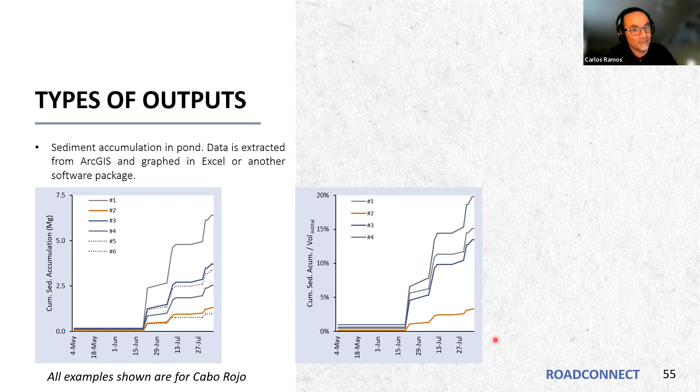Now, the most striking part of this, and this is ArcGIS, or a spatially explicit type of model. You can also show and display your results graphically in a map. And there's two types of results that come up from the model.

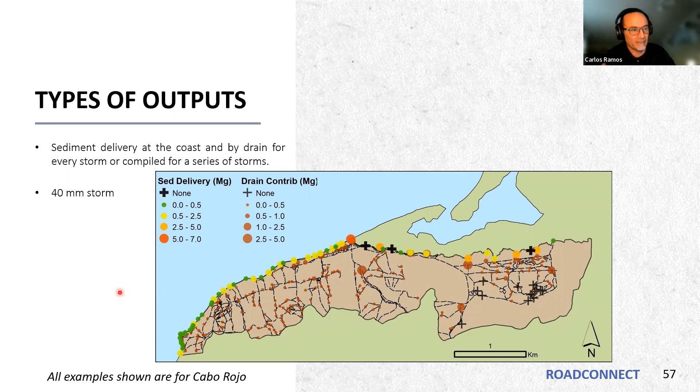So there's a lot of contribution of sediment that ends up here that is coming from these upper parts of this micro watershed. And then you can see there's a bunch of roads here that are not contributing anything. So all of the runoff and sediment is actually stopping before it gets anywhere close to the coastline. Very useful, right? You can actually start selecting priority targets for erosion control approaches.